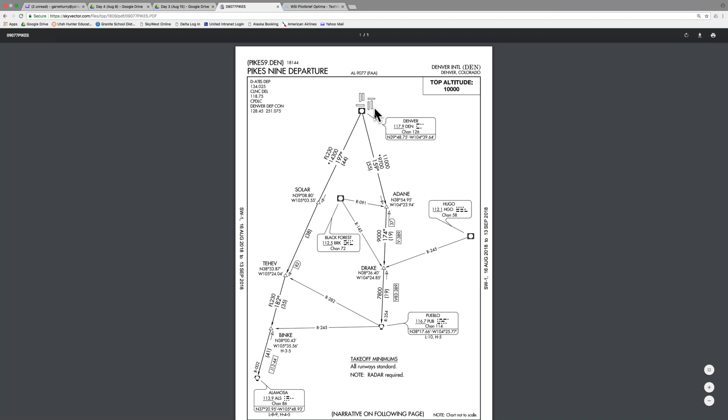So if they're flying down to the south, we can pull up this chart, and if we use the Pikes 9 departure, this is how we get from where we take off to that en route environment, where we're cruising along flying to our destination. So we don't have any issues, so we relieve some of that pressure off of air traffic control. They put everybody on these same highways - you can look at these as neighborhood streets.

Oops, that was dumb. Okay.

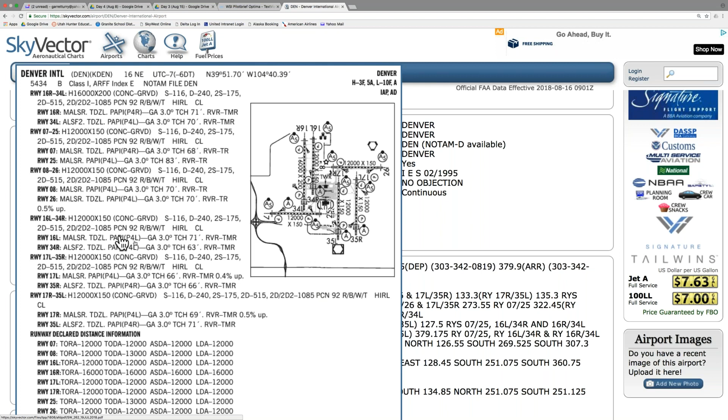And what that does is it measures the visibility from one end of the runway to the other end of the runway. Okay. How much weather visibility do we have? How far can we see looking down the runway? Okay. So all this information just gives us a breakdown of each one of the runways.

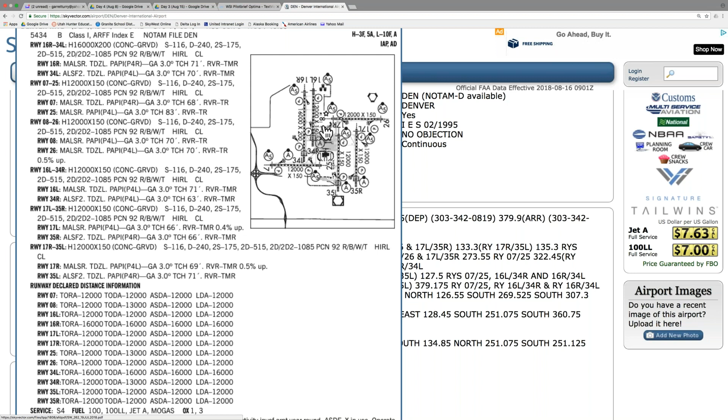Okay. Looking at this aerial view, you can also see that runway 16 right is the longest runway in the airport at 16,000 feet. Okay. It's about 3 miles long. You can see all these other ones are 12,000 feet by 150 feet wide. So there you go. You can see the basic layout of the terminals. You can see where the tower is, all of that.

Another cool feature is down here. This is that view that we were just looking at, that top-down view. It gives us a little more in-depth information than just that really basic one we were just looking at. Okay. Oh, here's what those numbers were.

Okay. So this is telling us the elevation of this runway at the end is 5350, so 5,350 feet above sea level. This one's 5,322 feet, so on and so forth. You can see all of that. Once again, here's our runway lengths.

Okay. Let's talk about runway direction really quick. So, going back to that compass rose. Okay. The video that we showed you guys, when was it? Thursday last week. Yeah, Thursday last week. It talked about basic navigation. So here you have a compass. Everybody's seen a compass, right?

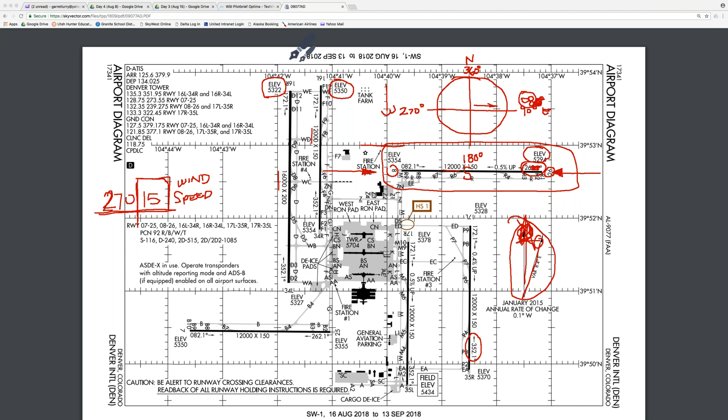There are so many variables in aviation. All we need to know is that we're using true north in our navigation. Okay. So when we're doing our flight plan, we'll be using true north. We won't adjust for magnetic variation. We'll just always use the true north. Or yeah, everything that we're reading on our maps is already adjusted and corrected. So we'll just use the information directly from the map.

So let me show you guys that. This is all already adjusted and corrected. Let me get back to where our flight plan is. So this one right here, if you look at the heading for our route, you can see that it says 274 degrees and 340 nautical miles. This has already been corrected and adjusted for any magnetic variation. So this is what the pilot will actually fly, a heading of 274 degrees. Okay. All of your corrections are done already.

Does that make sense? Yes, it does. So just read this information exactly as it is. Don't ever try to correct it. You just add a layer of confusion that doesn't need to be there. And that's one of the beauties of this software: we don't have to go in and adjust for everything. That's a pilot thing.

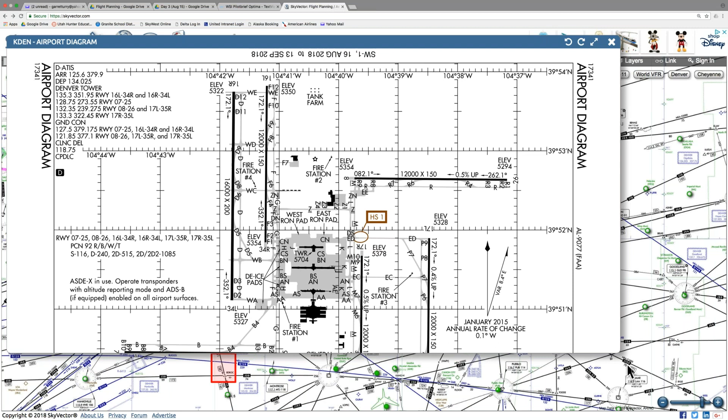So it makes it really easy for us when we're trying to decide what runway we're going to be using, because we always know this number, this 270 degrees. When we're trying to select which runway we're going to use, you can see we have a lot of runways here. All we need to do is line up our winds with that 270 that we saw in the wind report.

We'll just line it up with whatever runway is pointed mostly in that direction, because that's going to give us a headwind. We try to always land with a headwind. It helps slow the aircraft down. It helps create a little bit more lift for the airplane. So we would use runway 26 in this case. Everybody understand that? Yes. Yep. All right.

So you guys have seen some really cool features of Skyvector right there. Here we can always put in a speed. The only information that we ever want to use when we're using this software for flight planning is going to be our distance. We don't care about our time.

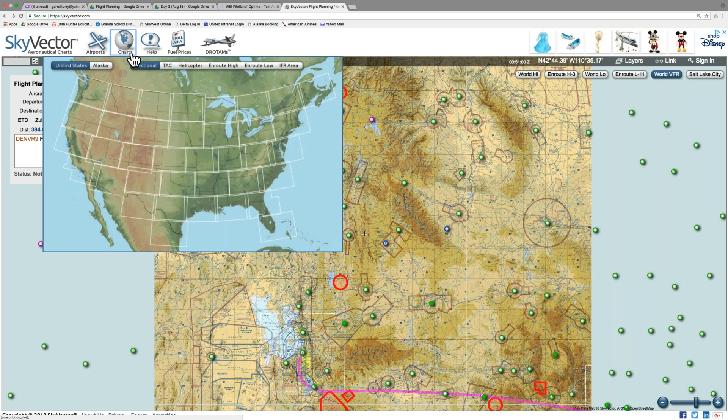I know on the VFR charts, if we look at a VFR chart for Salt Lake City, it gives us a legend, tells us a little bit of information about some of the symbols that you'll see on the maps. Tells us information on our restricted airspaces, also on our MOAs, our military airspaces.

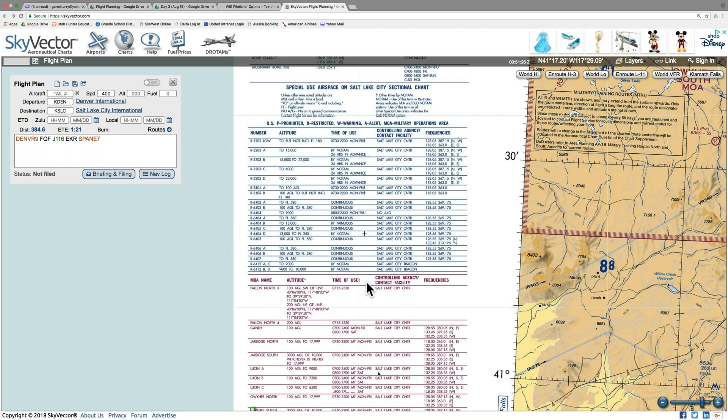But yeah, so that's the charts button. If you guys, it's kind of cool because this remembers your IP address. And so every time you log on, if I were to shut this down like that and log back onto Skyvector, I don't have to restart from scratch. It automatically saves my last flight plan that I put in.

If you guys want to start a new flight plan, you just click this paper with the dog ear in the top corner, and that resets everything. You can save flight plans. I've got, let's see, like I've got this one right here. You can load it up. So pretty cool stuff.

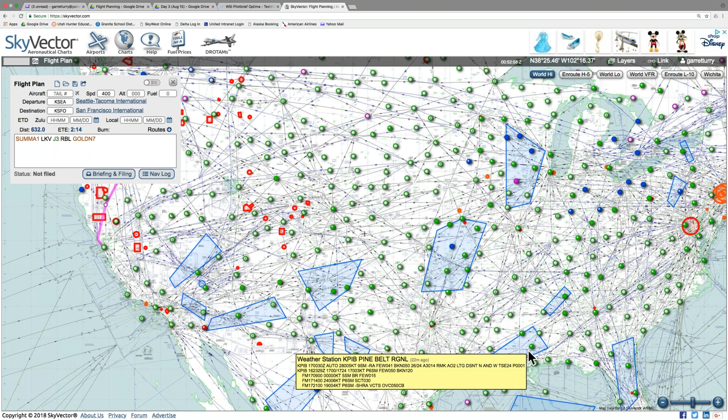And you guys are going to get really familiar with this. Another reason why we don't like you guys using these charts is you can see these are sigmets, convective sigmets. Like I said before, it pulls current weather information, and this is giving you current convective sigmets. These red boxes and circles are those TFRs that we talked about, temporary flight restrictions. Okay, you can see there's all of California's burning.

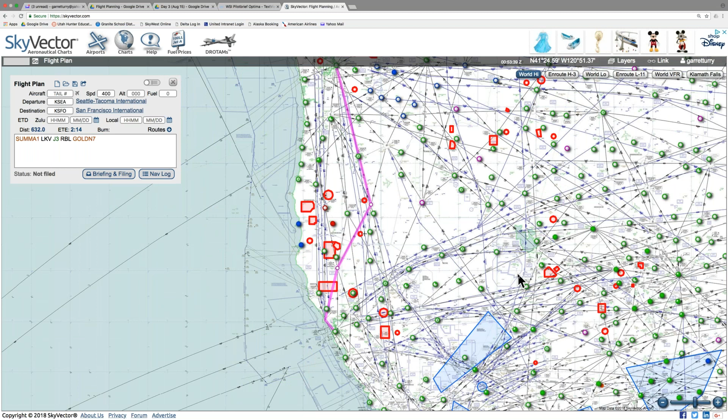And so they've got TFRs for the firefighters dumping water on the fires, stuff like that. So we don't want you guys pulling that type of information off of here. We're just using this as a reference in our flight planning. Okay, make sense? Everybody good?

I would highly recommend another thing - hold on, let me load this back up again. You know how we clicked on this nav log? You can also do it here. This will tell you the direction, the heading. This isn't corrected for anything. This is the magnetic course that you see.

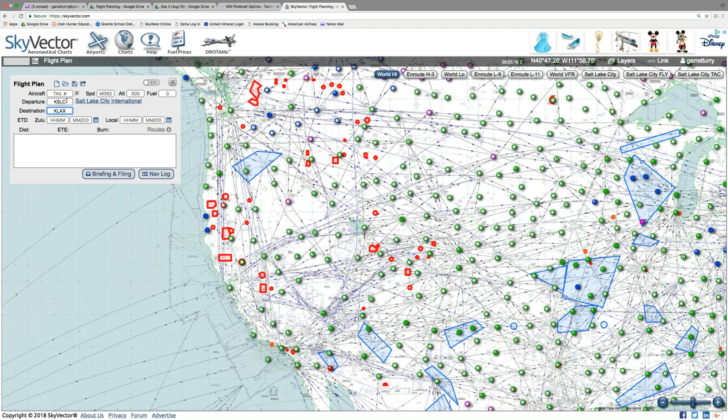Okay, so we will pull this off of there. You guys can pull these distances off. So it's nice in that regard as well. And we can switch it back to where it's just like this too. I highly recommend you guys jump on this website and just mess around. If you guys want to fly from, you know, just practice like, okay, Salt Lake City to LAX, put that in there. Get used to dragging and dropping it onto VORs and planning VORs, trying to stay on the black lines here.

So this is kind of a good example of sometimes our jet routes take us places we don't necessarily want to go. So we can use a low chart to get us onto a VOR that we want to be on. Then we can switch back to the high. You can see that it puts us on this jet route. And then it gives us an arrival, or I'm sorry, departure procedure there.

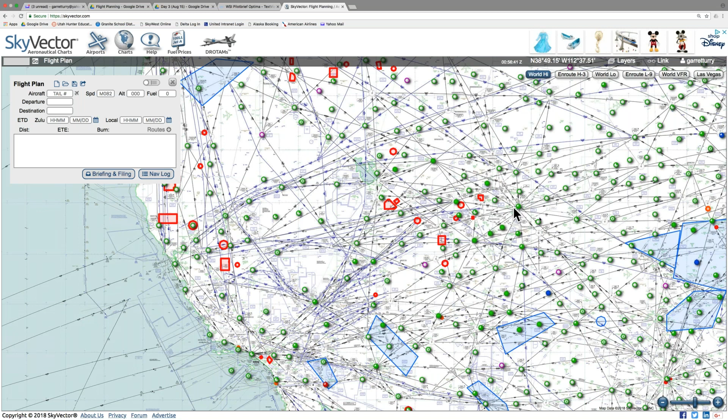Anyways, just get on there, play around with the software, get comfortable with it. We're going to use it a lot. You guys are really going to get familiar with it, but give yourself a head start. Also use this video in here in the day 3 folder, week 2 day 3. Click on the links here, pull up this YouTube video. It's all going to help you guys when we get to the flight planning portion.

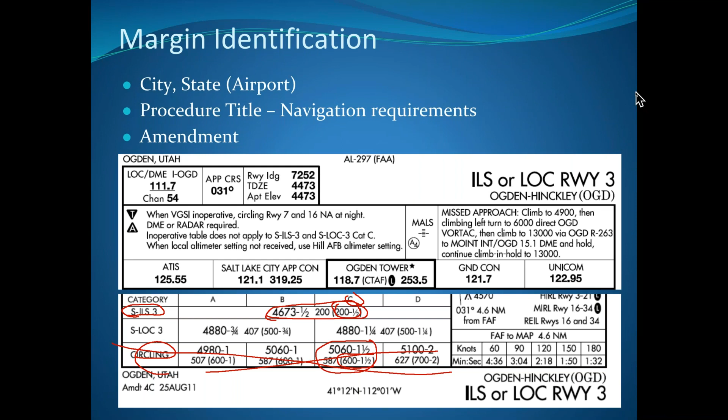Does that make sense? So it's not necessarily a question of whether, it's more likely a question of system difficulty on the ground—exactly. Like I said, even then, 99% of the time, even if they can't use the straight-in approach, they still won't use a circling approach. They'll use a different type of approach, like an RNAV approach or a VOR approach, in order to get their landing minimums, because those are typically going to be lower than a circle to land. Circle to land is an absolute last resort 90% of the time. It's like a backup, a redundancy. Okay, good question.

When it talks about this final approach course alignment from the runway being less than 30 degrees, what it's talking about is your initial approach fix. Let's say this is your runway here—your initial approach fix is never going to be more than 30 degrees deflection of the runway heading. So you'll always start at 30 degrees or less as you start your circling procedure from your actual runway heading.

Your descent gradient is talking about 400 feet per nautical mile, 400 feet in 1 nautical mile from the final approach fix. So you're going to descend at 400 feet per minute, basically.

Example, like a VOR A approach. Okay, what in the world is going on now? Yeah, there we go. So at the top, once again, this is NACO, so we're not going to spend a whole lot of time. We have this top portion called the pilot briefing. This gives them the radio frequency for their navigational radios.

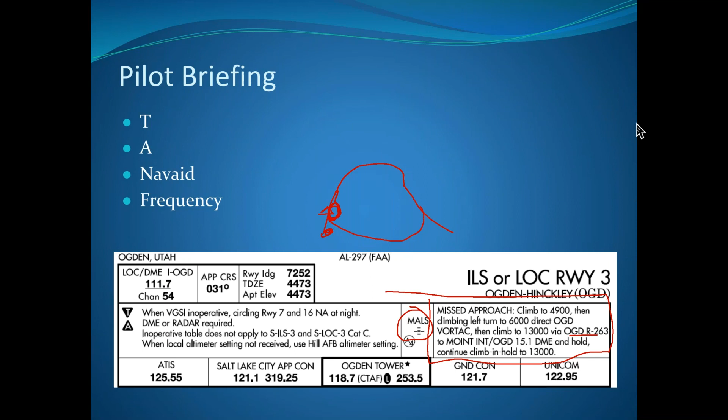And then they'll start the approach again. Okay, so that's the instrument approach, or the missed approach procedure.

Gosh, why does this thing come up? It's making me angry. Okay, ATIS.

This is our automated weather information system. So the pilot can tune into his comms radio, communication radio, to 125.55, and it gives them weather information for the airport.

These are the frequencies he's going to use. So 121.1, this is what our commercial traffic always uses. This is military, don't worry about that.

Okay, 121, this is air traffic control's frequency. Ogden Tower frequency, 118.7. If their tower is closed...

Getting ahead of myself. Okay, this is called the Common Traffic Advisory frequency. So their tower and everything's going to be tuned in to that 118.7.

This is where we're going to talk to other pilots, air traffic control, and so on, once we're near the airport. Okay, ground control, this is if we're on the airport taxiing to or from the runway. That's the frequency we're going to use.

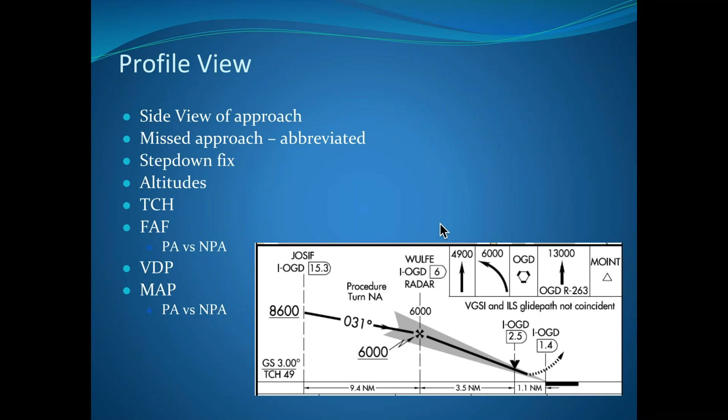Kind of important. Here's our profile view again. We're going to get through NACO.

Okay, cool. So let's look at our different types of approach lighting systems. This is very, very important.

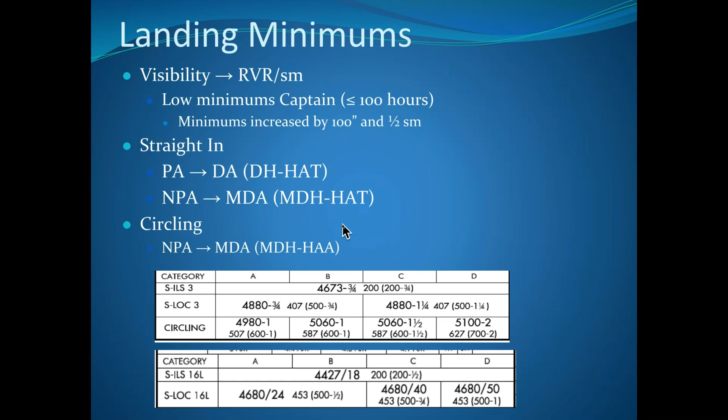Let's go back here really quick. I just want to see. Okay, so let's jump to our approach light systems, okay? We've got ALSF 1 and 2, okay?

These approach light systems, just all of them together collectively, this will typically dictate how low of landing minimums we can have.

So this ALSF 1 and 2, typically you're going to see these at bigger airports like Salt Lake International, Denver, LA, San Francisco, bigger airports, right?

And with these approach light systems, they can go below the standard ILS minimums all the way down.

Sometimes if the airline meets the requirements, they can do what we call a Cat 3C approach.

Which is basically you can't see a single thing outside of the airplane until you're on the ground, until your wheels touch down on the ground.

So their landing minimums are 0 miles visibility and 0 feet ceilings. They can go all the way down to the ground.

These airplanes are typically equipped with an auto land system, so the pilot doesn't even land the airplane. He's just there to watch the computer do its job.

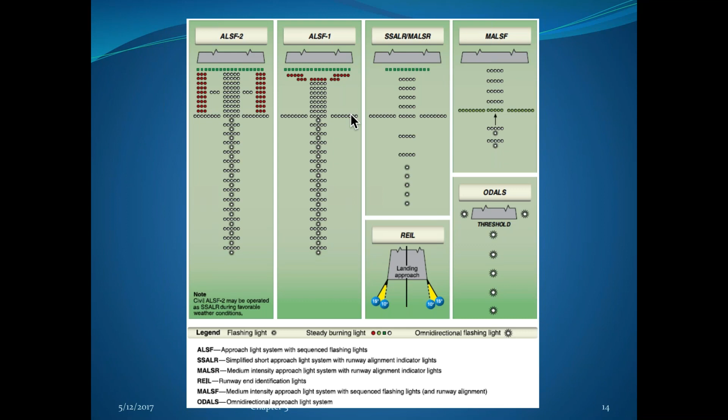Commit that one to memory. Okay, this is how the Jeppesen approach charts look, approach plates. A little bit different, but the same information once again, right?

You've got your straight-in ILS landing minimums. You've got your decision altitude or height. This right here is the altitude above sea level, mean sea level, MSL. This is your AGL, above ground level. This is what the pilot's going to read in the cockpit on his instrumentation, on his altimeter — 232 feet MSL means he's 200 feet above the ground at that point, which is what he sees on his altimeter.

So this is where our ceiling has to be, this is the minimums, remember? So here's our runway, our clouds up here blocking the view of the runway. This cloud has to be at least 200 feet above the runway. Does that make sense? Everybody clear on that?

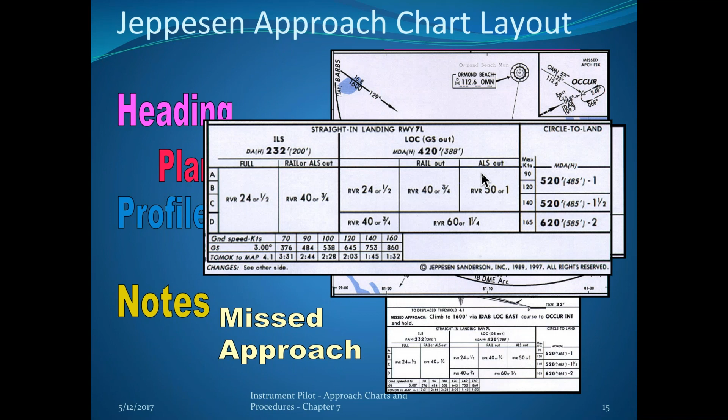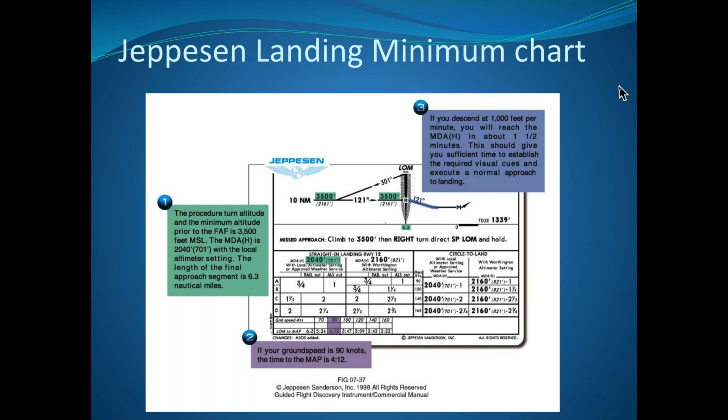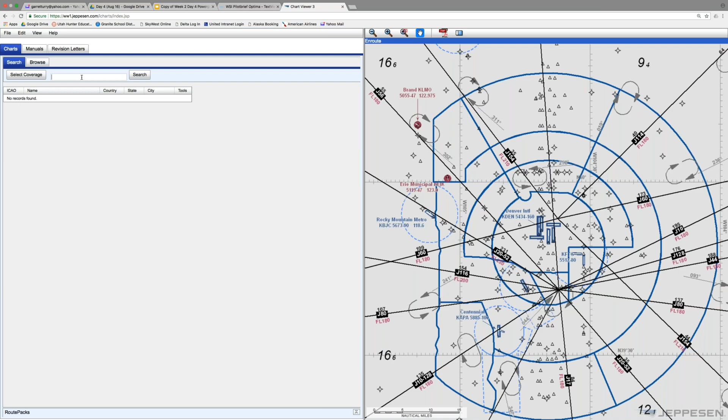Okay. This is how a Jeppesen chart looks. You know what? Screw that. We're just gonna pull one up. Okay. Somebody name an airport, a fun airport. Be imaginative. Grand Rapids. KJFK. KJFK.

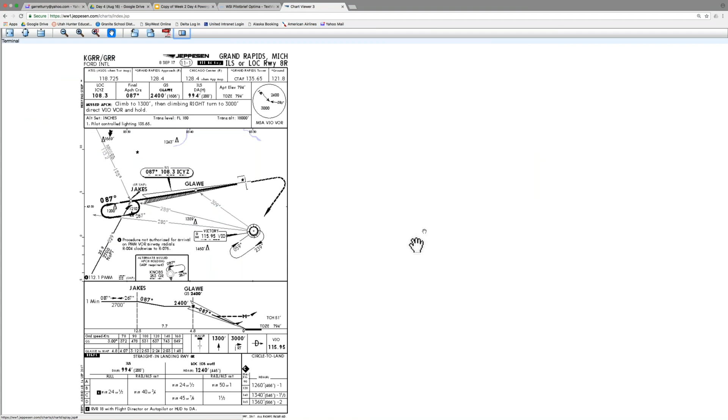Oh man, I hate JFK. Hate JFK. Hate LaGuardia. Hate Newark. I don't know why anybody would want to fly into those airports. Everybody hates them. Yeah, they're horrible. So busy.

Okay, so here's your Jeppesen chart. Just really quick, let's look at this. You can see over on this side, right here, these are all of our different charts for this airport. This 10.7 chart gives us general information about the airport. 10.7 alpha gives us a little more in depth. It's just a continuation of the 10.7 chart, okay? 10.9, this is the one that shows us the top-down view of the airport. 10.9 alpha gives us some information on our minimums.

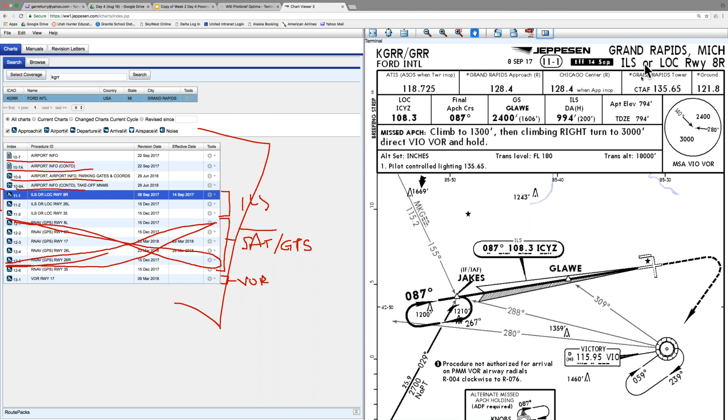And then here's our ILS approaches, okay? We have 3 available ILS approaches. RNAV uses GPS or satellite, okay? So these are satellite GPS approaches. Okay. In this class, if you see RNAV or satellite navigation anything, and I think I've said this before, we're not using it. Okay. And then down here on the bottom, we see our lonely little VOR approach. So ILS, satellite GPS, and VOR.

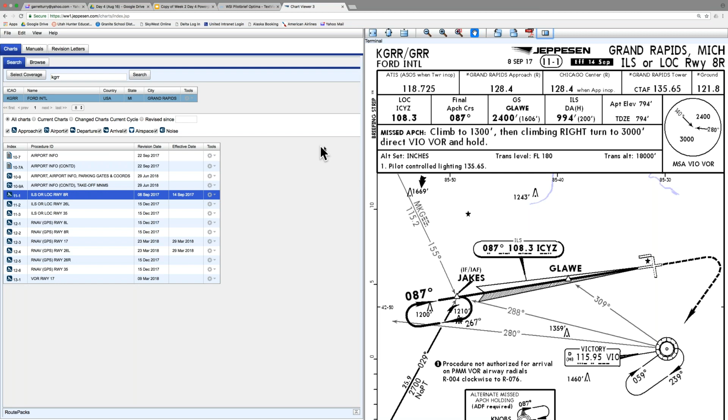Okay. Who can tell me which chart gives us our lowest landing minimums? Come on, y'all. Would it be the ILS chart? Yeah, ILS. There we go. I'm asked that a lot. What chart gives us our lowest landing minimums? ILS. Doesn't matter which runway. We're going to use the runway that favors the winds. Remember, headwinds, good stuff. So if our headwind is coming from the east going west, then we're going to use this runway 8 right ILS chart.

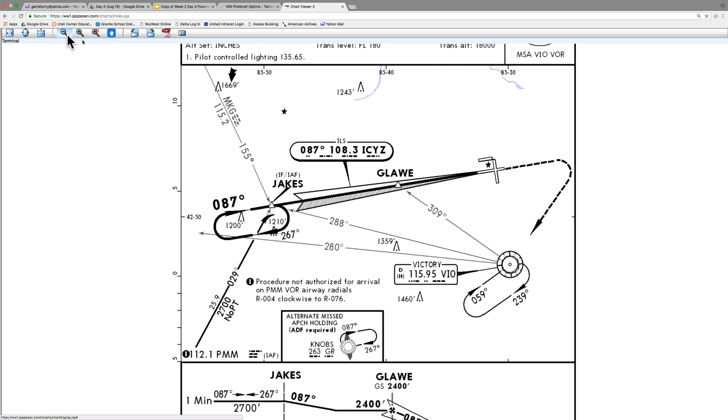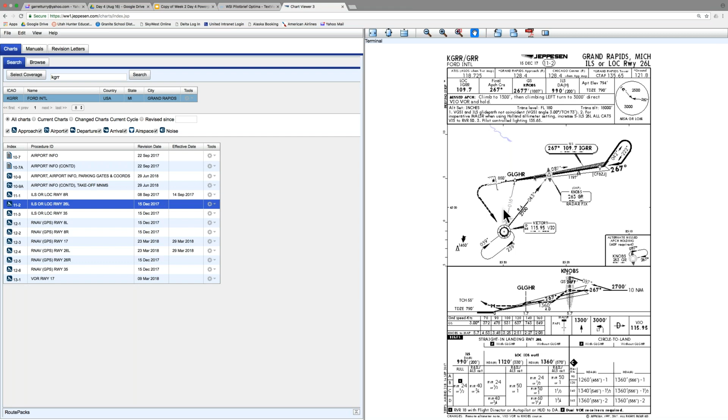Sometimes this Jeppesen freezes up on me. I want to see the whole chart. Oh my Lanta. All right, we'll use 26 left then. For some reason, it's not pulling up. Come on, just a couple more. Don't do this to me. All right. Anyways.

Gosh. Let's dissect this chart a little bit. Remember that pilot briefing box from the NACO chart? Here it is. Pilot brief. Okay. Here is something important to remember on your instrument approach plate. This is the navigational aid that this instrument approach is predicated off of. So not only is it giving him the frequency, it's giving him the type of navigational aid that is being used. So this is a localizer. Here's the identifier for the station, and this is the navigational radio frequency that the pilot tunes into. Okay.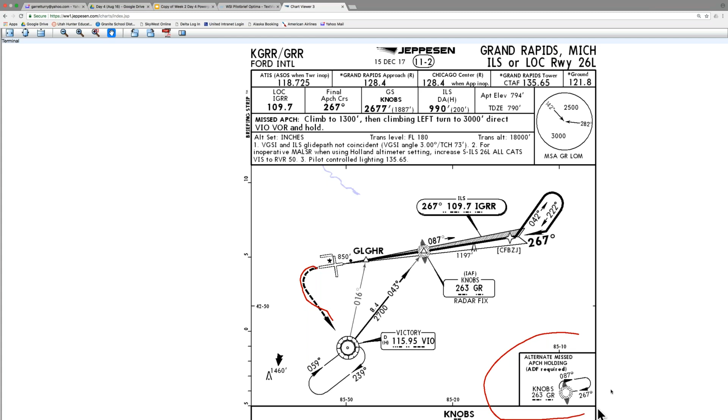Here's your missed approach procedure. You can see it there. Here's what your holding looks like. Alternate missed approach. Okay. Scroll down here. This is our descent profile.

Okay. You know that loop I was talking about? While you're doing that loop, you're descending to 2,700 feet. Then you're turning to 267. And you're flying at 2,700 feet. You're 10 miles away from the airport. You're staying at 2,700 feet on the 267 degree radial to the final approach fix. Okay, this is where we start that final descent to the runway. Let's say that he goes missed. This is where he goes missed, right here.

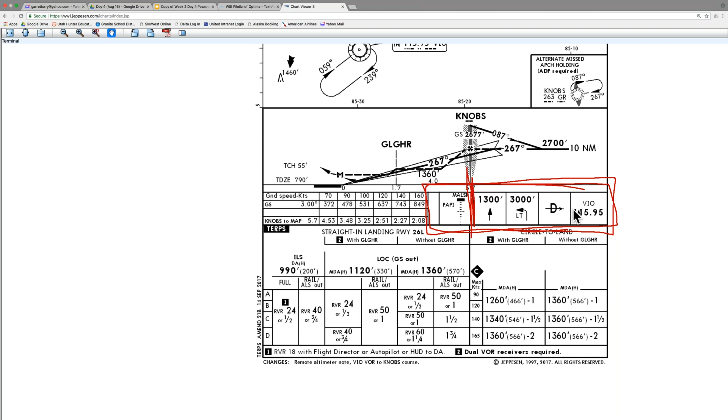Okay. This right here is a graphical representation of the missed approach procedure. Oops, I'm sorry. This box right here. This is the missed approach procedure just in graphical form. So you're going to climb on your runway heading to 1,300 feet. Then you're going to make a climbing left turn to 3,000 feet. And then once you're over the VOR, you're going to hold over the VOR, okay?

TERPS, okay, this is our straight in landing minimums for runway 26 left, once again. This is talking about the altimeter setting, okay? So if we have the Gallagher altimeter setting, we can use this, dual VORs required. Without Gallagher, we just go with the information that's already here. Oh, and that's if the glide slope's out. Notice that it's only over this section of the chart. Okay, you can kind of look at this part as like an Excel spreadsheet, rows and columns.

So these columns here, this is with the Gallagher, this is without Gallagher. If you're using the Gallagher here, you have to have 2 VOR radio receivers installed in your aircraft. Okay. Here's your straight in ILS approach minimums. You got 200 feet, half-mile visibility. Okay.

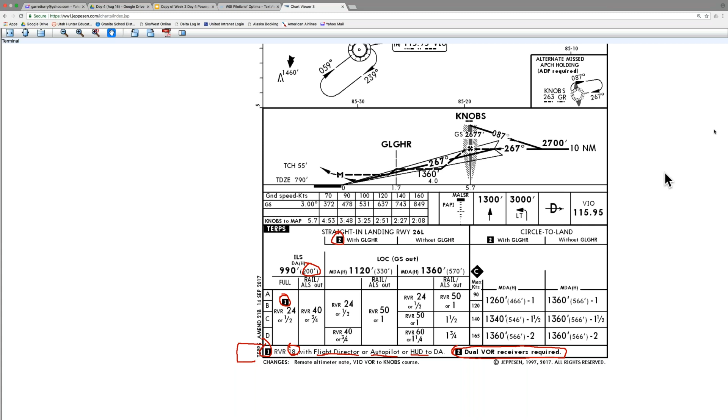Well, the number 1 refers to the number 1 up here, and it's saying that, standard is 2,400 RVR, we can go down to 1,800 feet RVR if we have a flight director or an autopilot or a heads-up display. Okay. If we have those installed in our airplane and we are using them down to that 200 feet, we're allowed to use 1,800 feet RVR. Kind of nice, huh? Gives us a couple hundred extra feet of cushion there.

How does everybody feel about it? Confused? Off your rocker? Yeah. Or do you guys feel good about it? Definitely gonna have to go through and watch this one again. There's a lot to know on these charts. Yeah. Exactly.

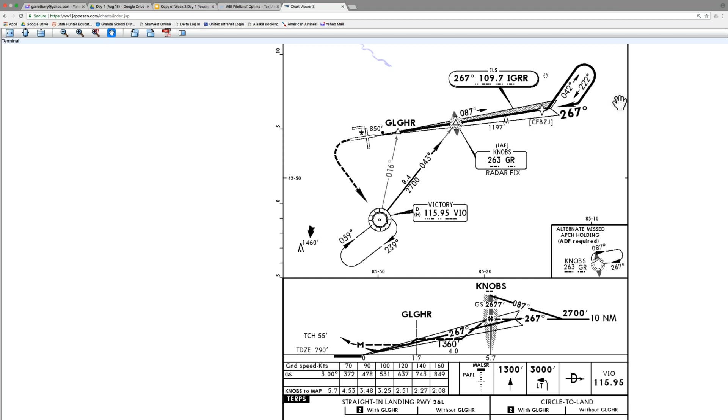So, that being said, let's break down what's important for you guys to know on these charts. I mean, it's all important to a point. You know, everybody's a winner kind of mentality here. But as a dispatcher, this is what you're going to be using 90% of the time. You need to know that and that. Okay.

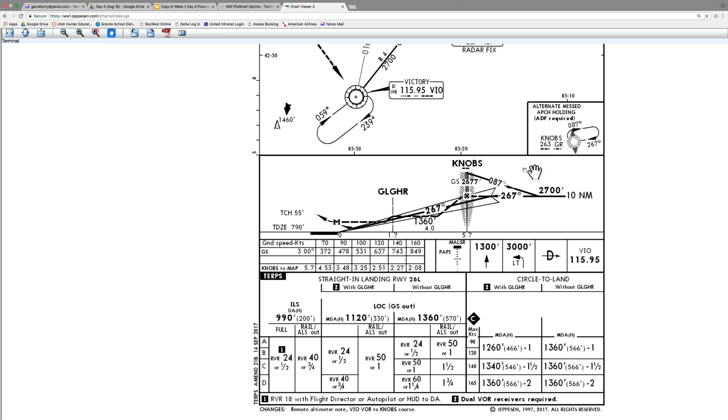And then the only other thing that you're really going to use as a dispatcher is going to be this right here. Okay. So know how to get your landing minimums. That's like the key. So if I say, what are the landing minimums for straight in ILS on runway 26 left? Come in here, runway 26 left, straight in landing minimums, 200 feet, half-mile visibility. That's what I want to hear, okay?

I want you guys to answer this one. What if I say, what are the straight in landing minimums for runway 26 left with the glide slope out of service, and you have Gallagher? What are our landing minimums? Remember category C as well. Always category C. Ceiling's 400 and visibility is a half mile.

Okay, so where are you looking? The second column with Gallagher, and then with rail, and C. And then right here, right? Right. Simple. You nailed it. 400 feet, always round up, right? If it's not at the hundreds, always round up. Okay. So 400 feet, half mile visibility. Beautiful. Okay.

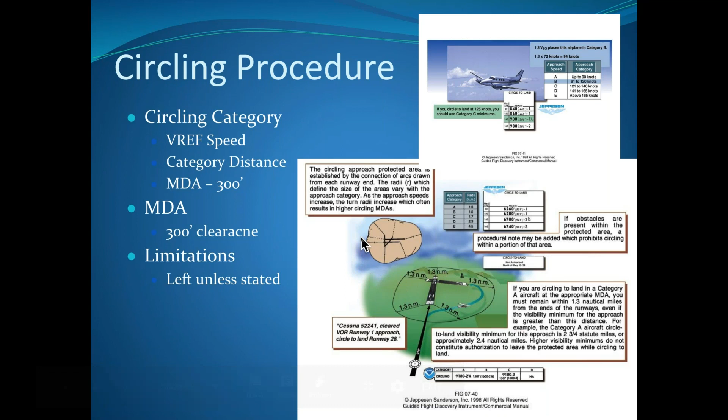We try to avoid these once again. A lot higher landing minimums is the important thing to remember with circle to land, okay? That's pretty much the only thing that I want you guys to remember with circle to land minimums: they are always going to be higher than our straight in. And they're typically really horrible.

Okay, landing minimums at our departure airport. This is talking about a takeoff alternate. And we talked about this in the FARs: if the weather is below landing minimums at our departure airport, we are required to list a takeoff alternate. Okay, kind of important, right?

So the reason for that is if something is to go wrong on takeoff and we can't turn around and land at our airport because the weather's below minimums, then we have to have somewhere to go. You have to have that planned out. Okay.

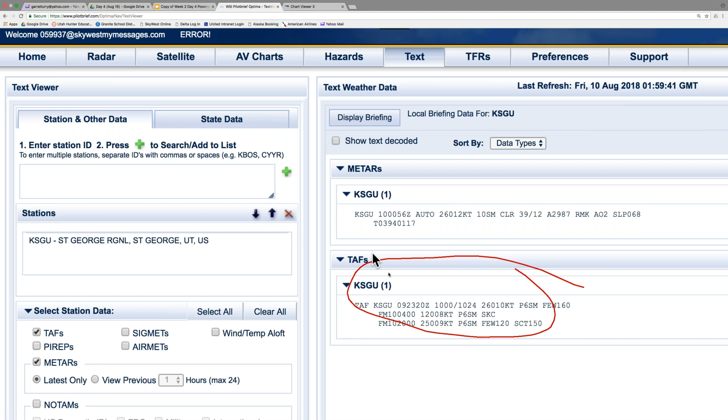Let's look at our weather report really quick. Here's our TAF right here. Actually, do you know what? I've made worksheets for you guys to practice legal to go stuff.

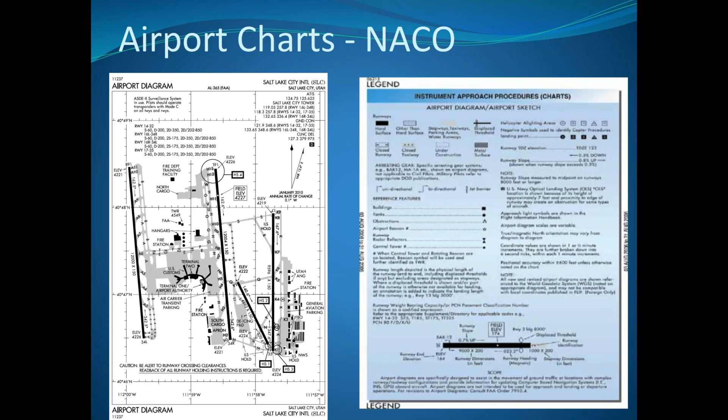So here's your airport sketches and diagrams. We've already kind of gone over these a little bit tonight, so I'm gonna go fast through these. There you go, we'll get into those a little bit more - break down a little more information as we go through the class here.

We don't care about visual, we don't care about RNAV. ILS categories - category 1, this is instrument rated, equipped with the proper avionics. Typically have to have DME, VOR, and radar to do a category 1 approach. Our minimums are typically going to be half mile visibility and 200 feet. Remember, this is ILS category 1.

So this is what we're using for this class. We will always be category 1 on our instrument approach procedures.

Category 2: the airline is required to carry a special certification saying that my pilots have been trained. Not only does the airline have to have this certification, but the pilot shooting the approach has to have the certification as well. The certification just says that this person's been trained on how to do the category 2 approach, and it's been approved by the FAA saying this airline's got the capabilities, and their pilots are trained well enough on how to do the category 2 approaches.

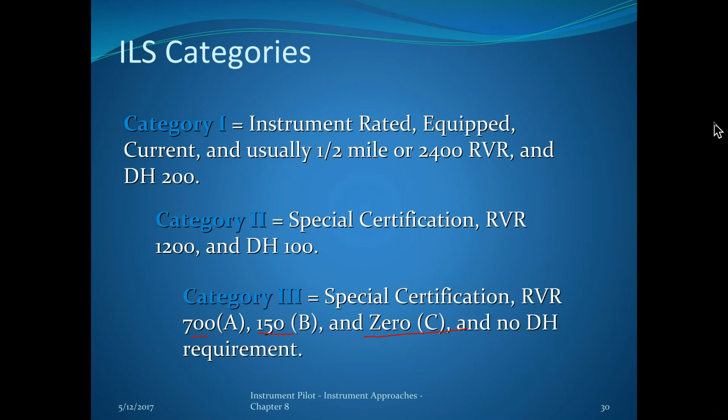What was DH? Decision height. So that's the height above the runway - that's the decision height. You didn't hear it on that video that I showed you, but...

What you'll hear in the cockpit when you guys are dispatchers and you're jump seating - you'll hear whenever they're shooting an ILS or any approach, really - the computer will say like 500, and then a couple seconds later it'll say minimums. That means they're at the minimum altitude where they have to make that go, no-go decision. Am I going to land? Am I going to continue with the landing, or am I going to go missed? Am I going to do a missed approach?

They always put the minimums for the runway they're going to be using into the computer, and the computer will tell them when they're at those minimums.

Some runways have additional lights. Here you have your center line lights. You've got your touchdown zone lights. You've got your end of runway lights - I can't remember what they're called. Runway alignment lights, you've got HIRLs. There's just a dozen different combinations of lights that you can have at a runway.

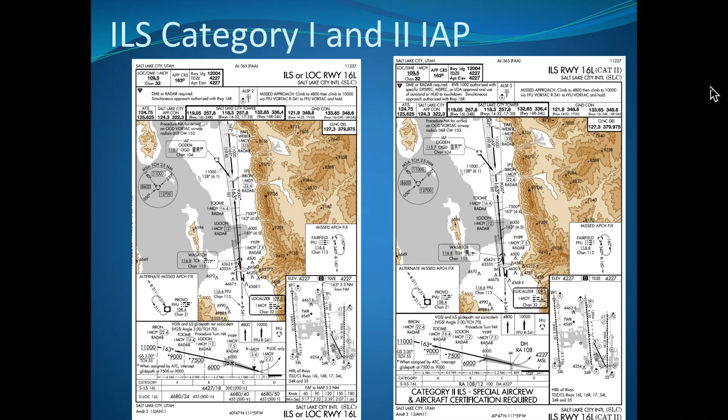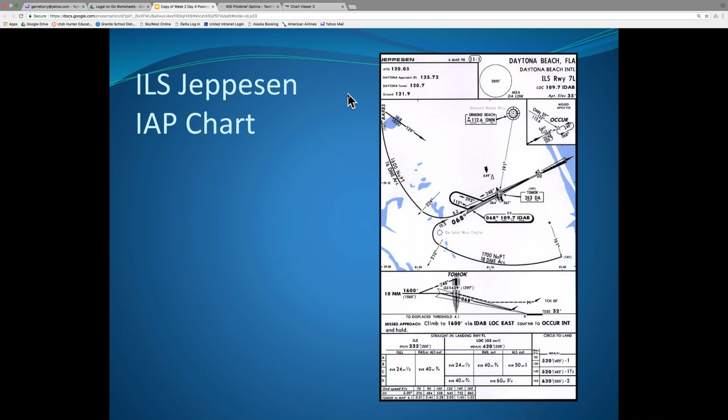Okay, we already dissected the Jepp chart, and that's the end of this PowerPoint. How do you guys feel about all that? Burnt out? Yeah, a little bit. It's okay, you guys can be honest with me.

Throughout the week though, it's starting to make more and more sense. It's starting to connect a little more, it's a little easier to understand. Yeah, because at the beginning of this week I was lost. Now it's like, okay, I kind of see where everything's starting to connect a little bit.

So here's your guys' homework for tonight, okay? I want you guys to come into this day 4 navigation stuff. I want you guys to watch these videos here. Super easy, I think they're each like 15 minutes long. Just play them, listen to them. They'll go over the same information that we just went over, but it's always good to hear it from somebody else.

I don't sit here and script everything for you guys, and sometimes I confuse myself, as you guys can see. So I'm not reading this crap off of a script. These other guys are guys that have been, these are the guys that probably wrote the laws, wrote the FARs, put together the navigational charts or whatever, and they'll read off a script, and it may make more sense to you guys. So please watch the videos, it will help increase your understanding of all the information we just went over.